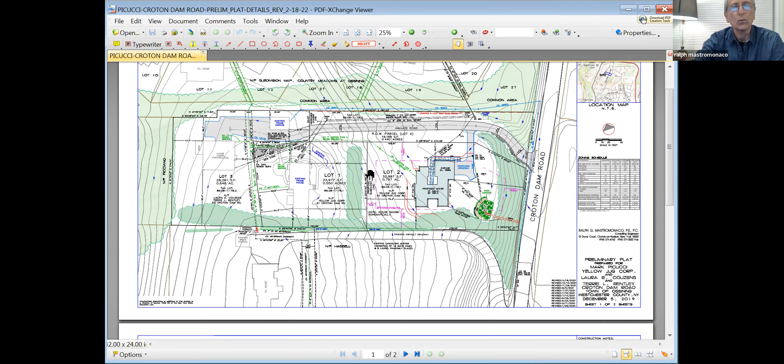Great, okay. This was the plan that we submitted about a month ago for your board, and you had asked questions about screening, and we went out in the field and we made some determinations about what the existing natural screening was around this proposed house. The second thing that changed was that Mr. Picucci worked out a house plan that he would like to build, and of course this is at some point part of your duties to look at the architectural features, so on. This plan really hasn't changed very much since we made the initial submittal.

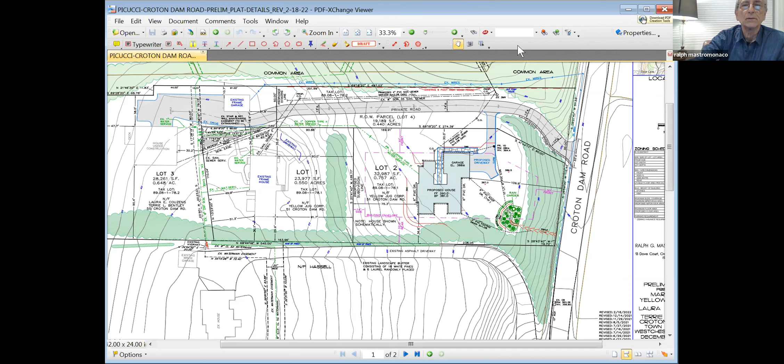However, one thing that you did ask for at the last meeting was to have us go in front of the John Hamilton building inspector and have his opinion. We did get his opinion. I responded to his opinion, and today he responded back essentially saying that our solution, which now I'm going to have to share a different screen at this point. I hope I can. I don't know if you can see it. Can you see a different screen now? Yeah, we see it, okay.

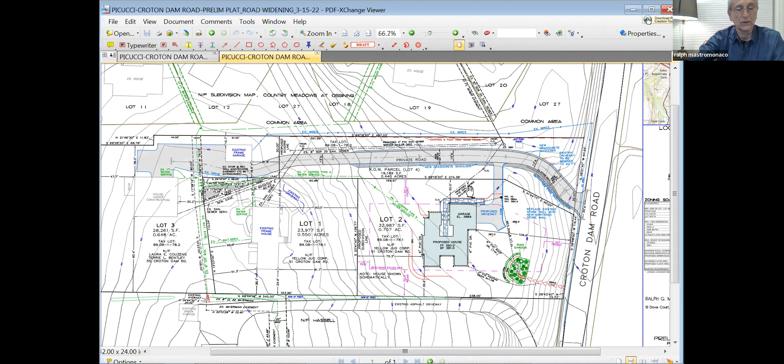So essentially it had to do with what's called Section 503, it's a fire code. And in that, according to John's interpretation, if you have more than two houses, the portion of the road up to those two houses needs to be 20 feet wide. Our private road is currently 14 feet wide, except at the very beginning where it is 20 feet wide. So we are showing, I'll zoom in, we're showing a widening of that private road to 20 feet. The widening would be accomplished using grasscrete. Grasscrete is a concrete paver and is strong enough to hold up a fire truck. But the advantage is it doesn't actually appear to be part of the road, it's grass grows up through it, so the road would appear a country sort of road. We think this is a good solution. If it's not acceptable, then we would pave it, but I think this is a better solution than just bringing in some asphalt here.

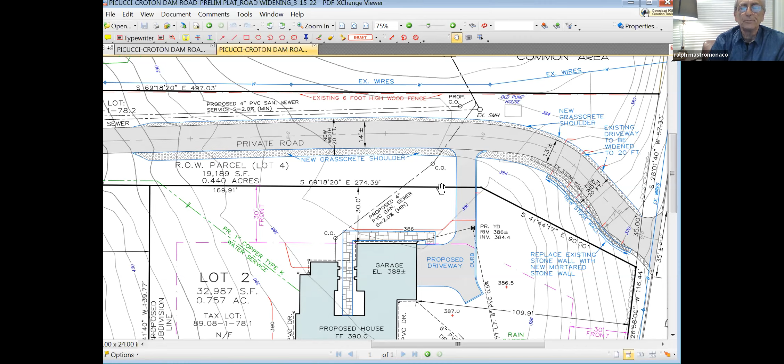In the same plan, we are treating stormwater. We have a sort of half detention, half rain garden feature down at the bottom. And essentially, I think you've seen this several times now. I'm not sure that there's anything that I could say that would be much different from what you've already seen.

So just briefly, I did see the chain of communications between you and John Hamilton. The last one I saw was where you were proposing this, but I did not see a response by him yet. You're saying that he did respond to it? By email this morning, yes. Roughly speaking, what did he say? I'm just curious, although we'll have to hear from him. But roughly speaking, he said it's fine.

That's good to hear. If I can, I'll try to get the... Mr. Chairman, I can read it, it's not long, just a couple of sentences, if you'd like me to read it. That'd be great, thank you.

This was from Building Inspector John Hamilton earlier today: 'The preliminary review looks good. I assume the roadway will be able to handle the weights as prescribed in the code, and I believe that's what Mr. Mastromonaco just attested to. I don't have it in front of me, so I can't check if a turnaround, hammerhead, or other requirement is needed, but I think we can get an okay on the width.'

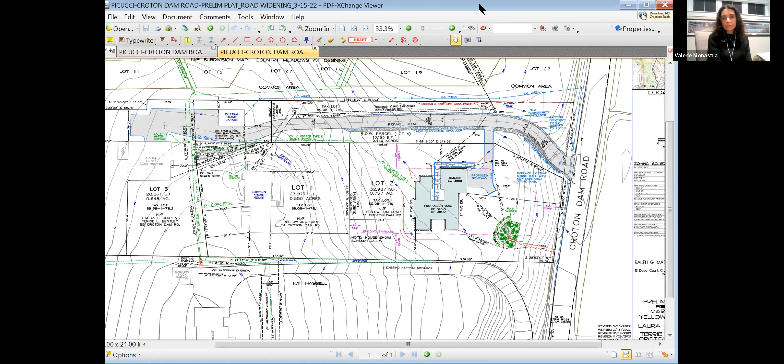Yep, no problem. Any comments from the board? Not at this time. Okay, so I think with that, we thank you for your submission, and consultants will be reviewing it over the next few weeks, and I imagine we'll be ready for the April 6th meeting, if you're able to. I think we should be able to conclude this as long as John is completely satisfied with those remaining questions. Has a public hearing been noticed on this yet? I don't know. Ralph? No. So perhaps this may be the time, if the board wanted to call for a public hearing to be held at your April 6th meeting, because that will be a requirement before we could take any action on this application.

Okay, I think that's a great idea. Do I hear a motion from the board to notice a public hearing for next meeting? So move. Second. Give it to Jim. Jim, how do you vote on that? Yes. Donna? Yes. Carolyn? Yes. And I vote yes as well. Yeah, we had yeses on all of them, right? Good.

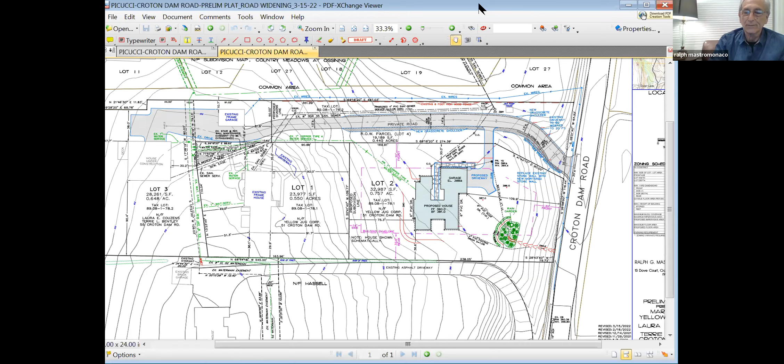So the next item on the agenda is Welcome Homes, 68 Somerstown Road. This is ARB for a new single-family home. Are the applicants or their representative online?

Hi, this is Jody Cross from Zarin and Steinmetz, on behalf of Welcome Homes. I also have with me Andrew Vaccarello, Anthony Carino, and... Mr. Picucci, I'm sorry to interrupt, can you mute yourself please? I've been trying, I could not on the computer. Andy, if you could just... okay, very good. Thanks, sorry about that. No problem. Okay, please continue. Yep, sure.

So just to repeat, we have Andrew Vaccarello, the civil engineer. We also have Anthony Carino, who is the VP of Design, and Kate Ryan, who's the Senior Director of Architecture for Welcome Homes. We're here seeking ARB approval to construct a single-family residence on a vacant property known as 68 Somerstown Road. I'll just share my screen so you can see.

Here's the site plan, just to orient the board. By way of background, Welcome Homes is a builder of high-end single-family homes, and they're what's called a turnkey provider. They work with clients to simplify the whole process of purchasing property, obtaining any necessary approvals, which is why we're here, and constructing the homes. We're here tonight on behalf of the contract vendee, with the consent of the owner of the property. The property consists of 2 tax lots, lots 3.1 and 3.2, created pursuant to a subdivision plat filed in 2018.

Can you see that? The house? Yep. Yes? Okay, great.

So Welcome Homes has 3 different house models to choose from. This is not like a cheap modular home. These are meticulously designed stick-built homes. Welcome Homes provides the homeowner with some limited aesthetic leeway, but in short, they can't make any architectural or structural changes to the home. Just some limited aesthetic options the customers can choose from.

So this is Welcome Homes Oasis 5 model. We prepared and submitted plans and renderings and material callouts, and this is from the material callouts. The home is about 4,543 square feet, 4 bedroom, 3.5 baths.

We also provided in our submission the required photographs of properties within 350 feet. As you'll see, the surrounding homes are varied in size and style. And as again I noted, this home will be a very high quality construction, and it's neither monotonously similar to nor strikingly dissimilar from the surrounding homes.

We also did receive the Nelson Pope Voorhis memo, noting certain information that's still required.

In light of the tight building envelope and the conservation easement and the wetlands, we weren't proposing any landscaping, but of course we're here open to any suggestions by the board if they want to see certain screening or landscaping, we're open to hearing all of that.

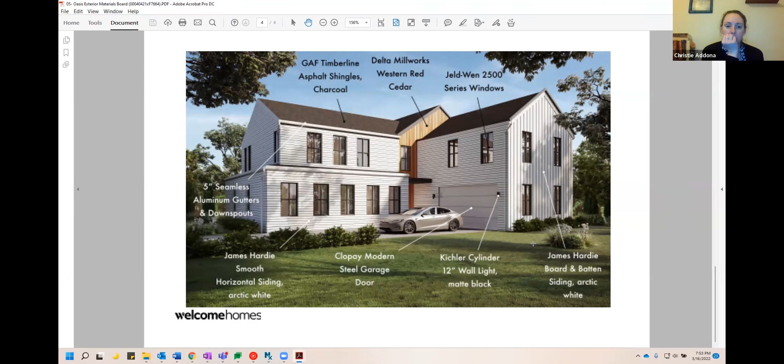Same with the lighting. There's minimal lighting provided, just I believe, and the rest of the team will correct me if I'm wrong, I believe it's 3 typical residential lighting fixtures near the garage and the front door. But we can show more information on the plans if the board needs to see that.

Also, as you saw on the site plan, we're pretty far back from the road. We weren't proposing any screening. If there's concerns about that, again, we're happy to listen to any concerns the board has.

Regarding tree removal, we noted that the NPV memo does state we have to show the existing and proposed trees to be removed. There are a few trees that will be removed along the driveway that was contemplated in the subdivision approvals. The driveway is in the same location that was approved in the subdivision. The house is in the same building envelope, though slightly reconfigured to accommodate the style of the house.

So any of the materials that you need additional information, of course, we're happy to provide that to the board in advance of the next meeting. We would ask respectfully that the board set a public hearing so that we could get going on this house.

So with that, I'm going to stop sharing my screen. And I'm going to kick this over first to Andrew Vaccarello to briefly discuss the site plan and layout. And then we'll kick it over to Kate Ryan to just discuss some of the architectural details and design. And Anthony Carino's here if there's any questions regarding the materials that are going to be utilized for the structure.

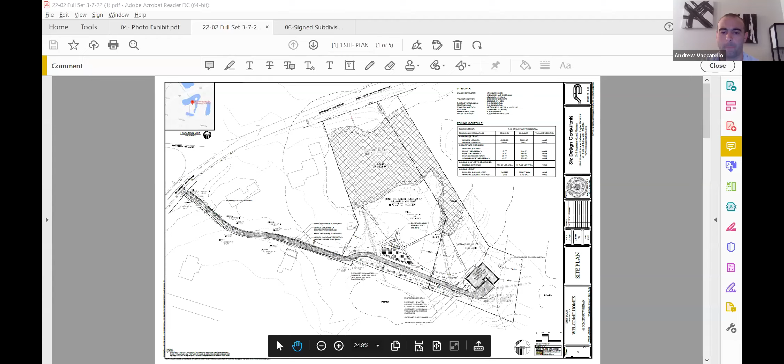Thank you, Andrew. Now, if I could have Kate, if you want to share your screen and discuss some of the architectural features of the house.

Sure. Thanks everyone for your time. Jody, I think, covered quite a bit of what might be relevant with regards to the architecture, but as she said, this isn't dissimilar to other homes in the community. We're about 4,500 square feet.

The total roof height you can see here is 28.11. The floor to floor height on the first and second floor is 10 foot and then 9 foot. And the windows that we're showing here are casement windows, and they are 6 foot by 2 foot.

We have an 8 foot front door, and then I think you can see here there's a light here. There'll also be lights that are in the overhang above the front entry.

And in terms of the materiality, as Jody mentioned, I think Anthony can speak to that, but if you have any architectural questions, please feel free to throw them my way.

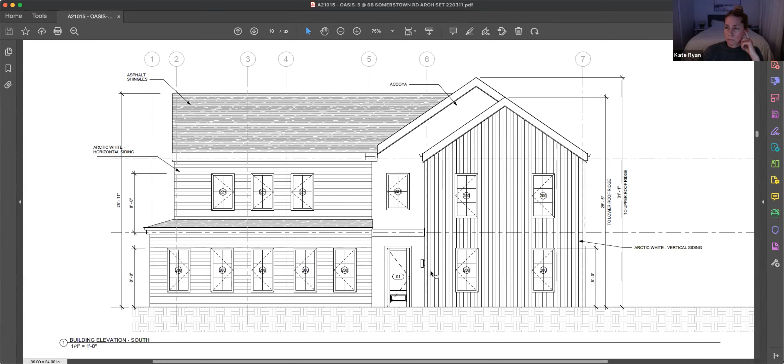All right. Okay. Thank you, Kate. So I guess at this time, I'd like to know if the board has any questions for me, for Andrew, for Kate. Okay, and we're done with our presentation.

Great, I think we do. Let's start with the consultants.

Valerie? Yeah, so I think Jody touched upon my comments specifically dealing with the landscaping and the lighting for this board's review. But the other thing I wanted to bring up, and Christy, I think you can probably weigh in a little bit on this, is that the stormwater is being proposed for on the neighboring property.

And I understand the concept of it is that because of the site constraints. But in terms of future development of that particular property, we're going to have to work out how to deal with the stormwater scenario, where if this board approves it on another property, how that will reflect later on down the line in terms of potential development of that property.

Yeah, the stormwater is proposed to be in about the location of where there was contemplated to be a house on the subdivision plat. So I'm not really sure. And then, if you move further back, you're up against the pond and the conservation easement. So I'm not even really sure what the development capability potential would be with this proposed plan.

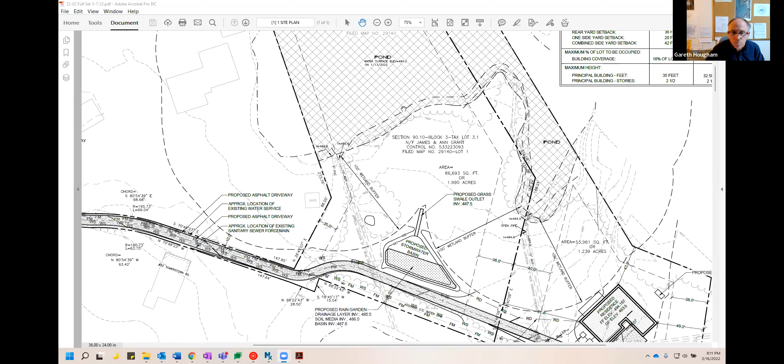Okay, I'm not sure I follow up about the second part of your question, about the second line. Right, so I wish I could point to it. Hold on, I'm going to share my screen if that's okay. Okay, great, go ahead. Is this what you're talking about here? Those double lines? Yes, exactly.

Ah, and those double lines follow all the way around. It appears that the 100-foot buffer double arrow is referencing one of the lines, but not the other. It seems to be referencing the inner line for the most part.

Sure, I can address the question. The inner line is the limit of the actual delineation for the wetland, showing where the soil scientist determined that wetland limit lies. The outer line close to that is the limit of where the conservation easement exists. So the easement does extend beyond the limit of the wetland, but we were using the actual wetland limit as the buffer to calculate it. That line was offset 100 feet to establish that buffer.

Okay, that seems proper, thank you. Thank you for that. So perhaps we just need a label on the plan that shows limit of conservation easement, limit of wetlands, to show what those dotted lines are. Sure, we can do that, in case one of the neighbors ends up going to the building department to take a look at the plans.

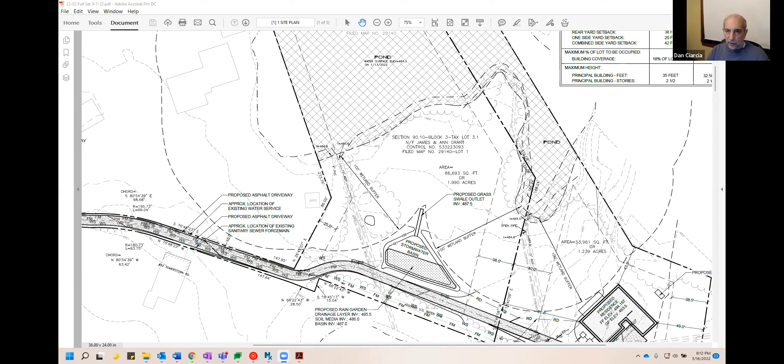Sure, we could do that, right, Andrew? We don't know if the board would find it informative, but maybe, I mean, this isn't an ancient subdivision, it was approved probably like 4 years ago. Perhaps it would help inform the board if we ask the applicant to show what the limit of disturbance was on the Grant subdivision, which is the application that created these two lots, so you can see how that compares to the activities this applicant is proposing. Sure, we can put together an exhibit to show the limit of disturbance for that prior subdivision.

One thing I wanted to mention about the Tavano neighborhood - I believe that neighborhood has in the past contemplated seeking historic recognition. They received it, I do believe so. So you may have an additional burden architecturally to bring it into compliance with that aesthetic historic district, but I don't know. That certainly should be addressed.